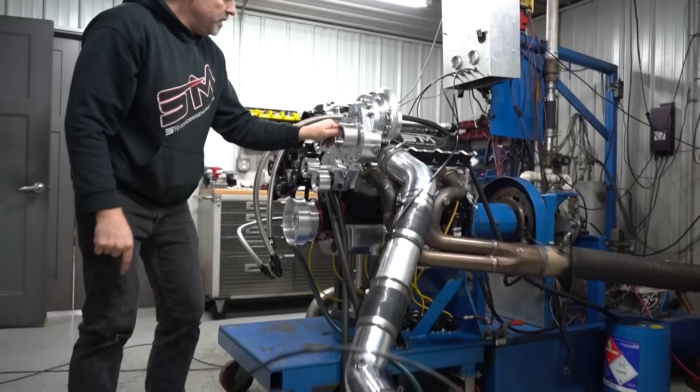3 blowers, 1 Ford block, a tube, no belt, not running anything. You want to see what's going on here, you better watch this video.

Hey everybody, in this episode we're going to show you a true street, an NMCA class where they got to drive this engine and make 3 back-to-back passes.

This thing makes some serious horsepower with twin TorqStorms, and the TorqStorm guys are here. We're going to actually test some other stuff, including a single blower instead of the twin, and I'll go over the whole package here with you in a minute.

Alright, so this engine is for TorqStorm themselves. Those guys have 2 or 3, I think they have 3 race cars right now that they're racing and doing all their development work and testing work on for the blowers.

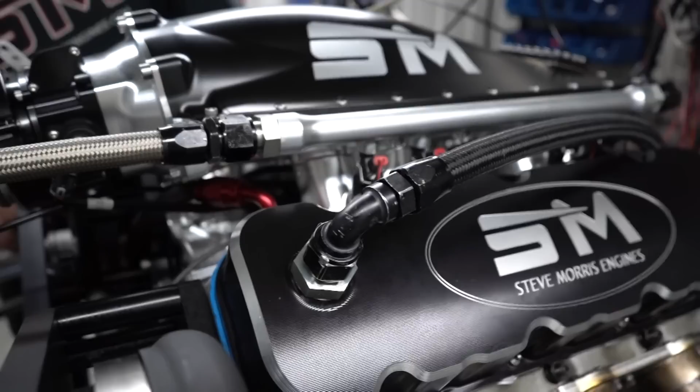Now, first off, let's cover the engine. This is our Stage 2 500, basically our Stage 2 540 cubic inch engine. Now this one happens to be a little bit bigger than that because this is the one that actually converted and used some parts that they already had, so this is 565. But the same thing as our Stage 2 engine that you'll find right on our website, with billet intake upgrade, and this is a steel rod motor, because it's on gasoline.

So let me tell you exactly what they got to do, and then we'll go back to the engine. So what they have to do is when they go to make their passes for the day, they can do all their testing and do anything they want there before the race. But during the race, they have to go make a 25-mile drive, put the car in the staging lane.

You cannot touch the car. You can't do anything except set tire pressure. That's it. You can't add fuel, subtract fuel, change fuel, pop the hood. You cannot do anything. You have to race it, and you have to race it round robin. You can't come back and cool down. You can't do any of that.

You literally have to go make a pass, come right back up in the staging lane, and they make you make another pass, then come back up in the staging lane and make you make another pass. So that's why this engine combination kind of fits our niche of what we do, which is duration, drag and drive kind of stuff. So this is a little bit different kind of drag and drive, but basically is a drag and drive. The not cooling down in between rounds is kind of a big deal, actually.

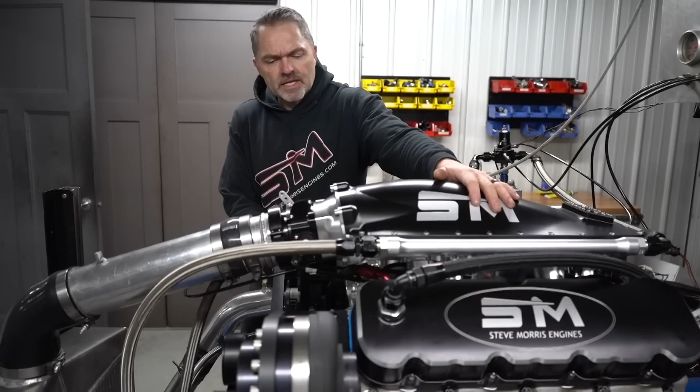Compression-wise, go back to that. These things, we typically set them up at about 10 to 1, right in that range. This is a steel rod motor because it's gasoline. Methanol motors, we almost always use an aluminum rod in those. Has our billet manifold upgrade. This is Holley EFI. This has a Dart 380 cylinder head on it. We'll typically use those, or we'll use the Brodix 383 headhunter heads as our typical deal.

Just a solid belt drive, standard camshaft, 842 lifter. This is just a really good, solid general piece like what all our Stage 2 stuff is. Like I said, you can go to the website and see what the Stage 2 package includes.

Now, what we're going to do is make our baseline pull, and this does make really good horsepower, especially for how much boost it makes. Now, before everybody gets all gung-ho and says, but it's got two blowers on it, why doesn't it make 5,000 horsepower? Listen, that's just not the point. Part of the packaging and everything that the TorqStorm guys do is, this is a legit serpentine drive system.

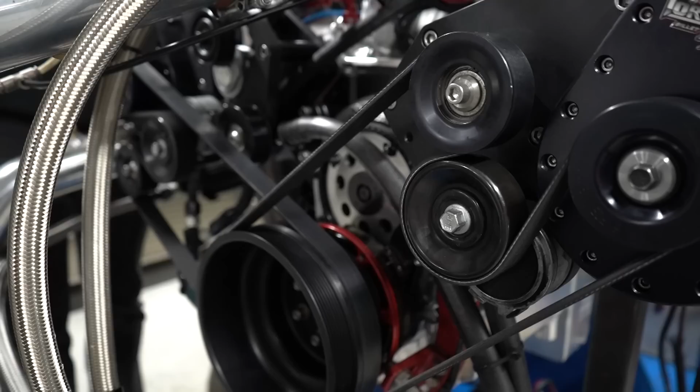The whole point of what they're trying to do is you can put AC, alternator, power steering pump, everything can all fit, and they have bracketry for all of this stuff, which makes it nice. It's symmetrical, just kind of a nice, cool package.

It doesn't need to, and they're not trying to make the maximum horsepower with their systems, but this makes some really good horsepower with the system. We are going to show you that they're developing and working on a bigger single blower for the extreme street class, a 91 millimeter supercharger, to compete in that class. And we're going to test it on this engine, which would technically be too big for that blower.

If you ever wanted to see anything about that, go to my playlist and you'll see some sections about blower speed and how blowers affect performance - how you can have too much engine for the blower. Let's just put it that way.

So there's a lot of stuff you can do there. We're going to test some other stuff, but first, let's go ahead and make a pull here. We've already done all the tuning, everything's all good. We're going to make a pull on this thing, show you where it's at right with this pulley combination, this boost, what this thing makes, which is really good horsepower, especially for something that is drag and drive with no cool down, no anything, no changes, tire pressure only. So let's go make a pull on this thing.

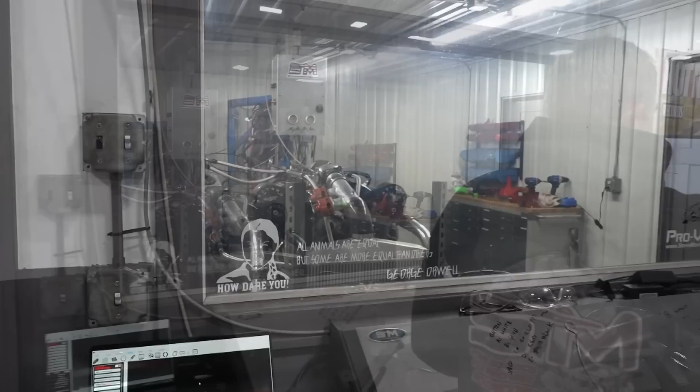Alrighty, so that's really nice power right there - 1,898 horsepower. Did I mention it's on gas, C16? So it will run on pump gas at a little lower boost level than this, and we'll go look at the boost right now.

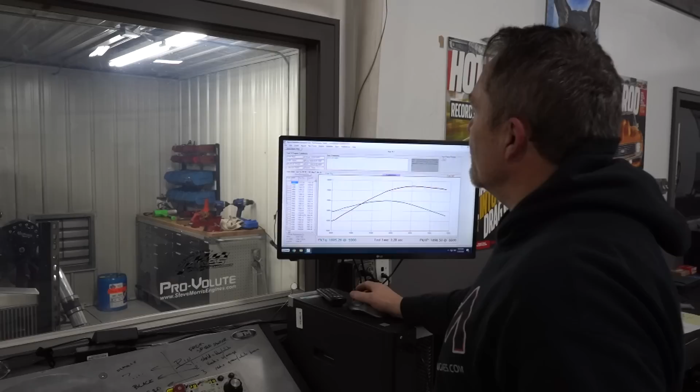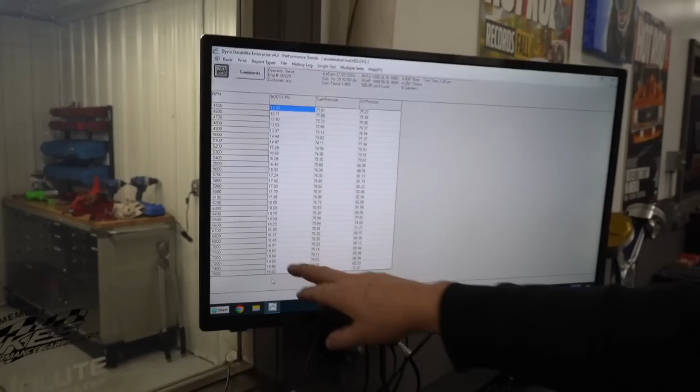And right there you can see that is at 18.5 pounds of boost. This Dyno's gauge is a little bit less, I think it actually says like 19 on the Holley. So that is our really good spot. Torque wise, 1,605 foot-pounds of torque.

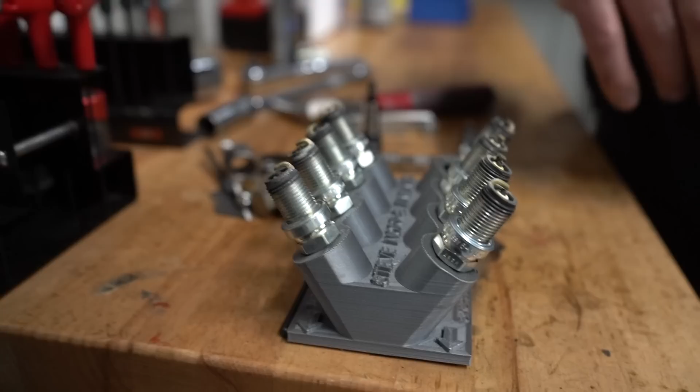Alright, so now we just made that pull, and I wanted to show you the spark plugs, because we always have questions about spark plugs. So you can come here, look at my little spark plug holder thingy, and it's kind of a cluttered mess over here right now. But one of the things that we did here is for Scott's car, he used to be running this with a blow-through carburetor.

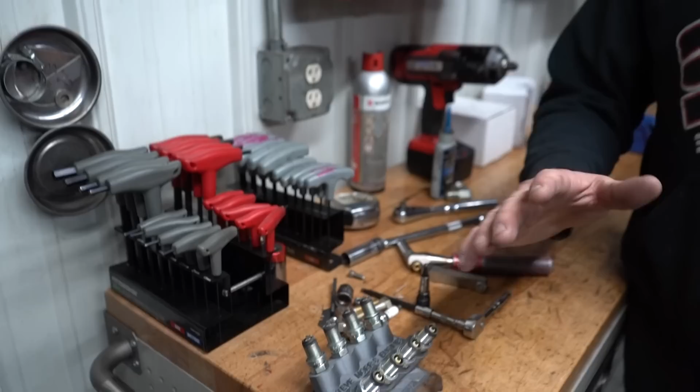And blow-through carburetors are fine, no problem. But this is obviously getting into that magic horsepower area where it's just physically impossible for the carburetor to make. It's beyond physics. Physics might be the wrong terminology, but it's not even rational to think that this carburetor can distribute fuel equally to all 8 cylinders.

Hence, and that's the same thing with the Snipers or any throttle body type injection system - individual port injection, we can do a much better job of controlling individual cylinder fuel. A carburetor, you cannot control individual cylinder fuel. There's always a sacrifice that one cylinder is going to be leaner and one cylinder is going to be richer than the other. It just is what it is. So you're always balancing, trying to make the happiest compromise.

Problem is, the higher the horsepower you go, you'll tend to have an issue. Somewhere down the road, it's going to pick on a cylinder and hurt a part. It just does. That's why I don't like to have this. This was because Scott did run this engine at that 1,850 to 1,900 horsepower level. Thankfully not very often, because that was actually faster than what the car could legally go. So at that really high horsepower level, it will hurt some parts.

So Scott wanted to change this thing over to the billet intake manifold, which I wanted to change it over to anyway because it's just better, and it is just drop dead sexy. So sexy - it's the best looking manifold on the market. Anyways, you can see the spark plugs here, look real good.

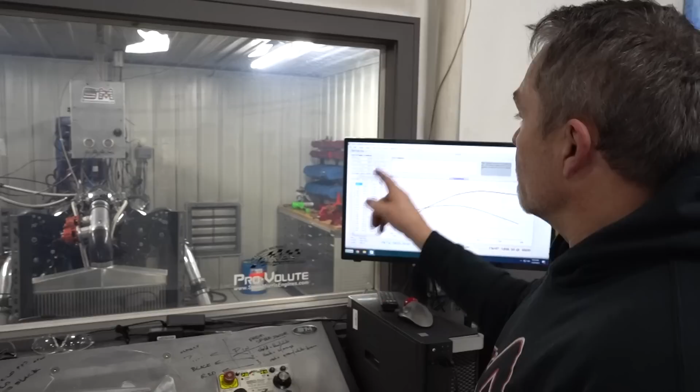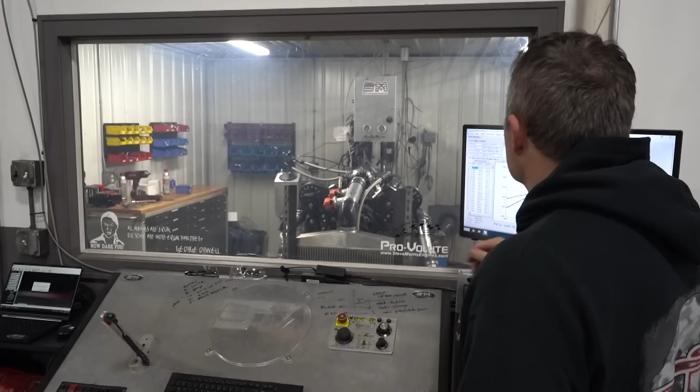So first thing we're going to do, this is our baseline. It's all tuned up, this is where it's going to run in the car normally. Now Scott has actually put a 750 cage in it so he can go faster than 850s like he was going, so he'll be able to go faster in that class. We'll be able to utilize all the horsepower that's there.

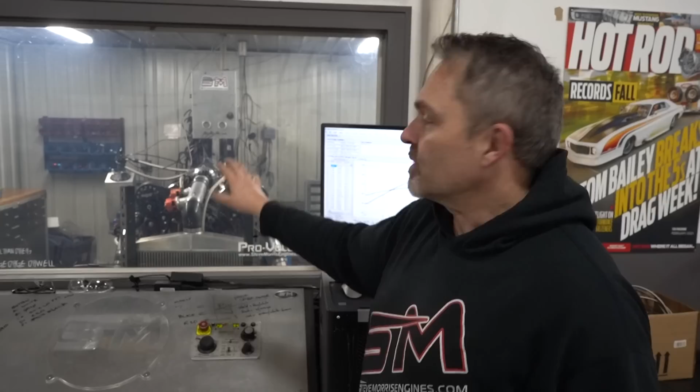So we're now going to put on a single one that isn't for this engine, isn't for this class, but is for the extreme street class. So they're going to put that all on there. We're going to do some testing and then do some testing on how much horsepower it takes to run that blower, which you'll find interesting.

Okay, so it looks a little odd, so get over the looking odd thing, because this is Chris, the other half of TorqStorm. This is Scott's motor, who is the other half of TorqStorm. So it's going to end up having the other blower put back on, so he didn't bother taking that one off. So that one's not getting driven by anything, but this is the new blower that you want to test. Tell us a little bit about it.

It's the TS91R, it's our new bigger blower. Seeing some good stuff on our test stand. We need to test it on a motor and do some comparisons, see where we're at.

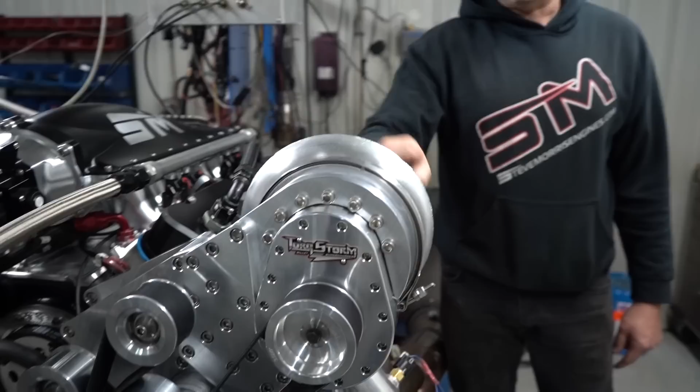Okay, cool. You'll see here too, they did a billet volute for it. So obviously they're developing with the billet volute and then going to end up casting pieces for it. We're going to still do the billet center section. So it has a bolt-in billet center section, a landing area. Yeah, we're going to keep doing that because there's advantages to that over the cast, different things you can do to the landing area.

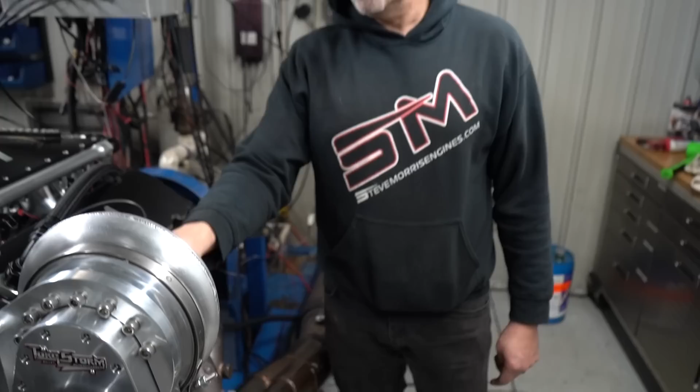Sure, okay, that's cool. And then you told me, so this is, you want to get on the back side, so this is a 6-blade setup. So you told me something interesting there, what you found. So they're measuring at their facility, they're measuring airflow, temperature, and pressure. And that the 6-blade is actually better than, in this blower, the 6-blade is better than the 7 and 8.

So you had a 7 and 8 blade, and those made more temperature. At the same PSI boost, same drive ratio, everything. So that would mean less horsepower. That's just basic math. It does.

So the other thing we're going to do here, I'll show you in just a minute, is then we are going to test how much horsepower it takes to drive this blower. I'll show you exactly how we're going to do that, because it is so stupid easy, but really interesting the way it all works. You just don't even think about it. But you'd be surprised, and we have other blowers over here that we're not going to mention or talk about, but we're going to actually test those too, because it's just kind of interesting to see direct comparison here.

So anyways, let's go out and make a run on this. This will be the exact same tune-up as with the twins, just with the single. All we want to do is just see what it does.

Right, and so since we're also leaning on it, or spinning it up pretty good, how fast are you spinning this? It's only 60,000 on the impeller speed. Okay, so we spun it harder than that on our test stand. But if this motor went more RPMs, we could run it harder, but it's like done at 67.

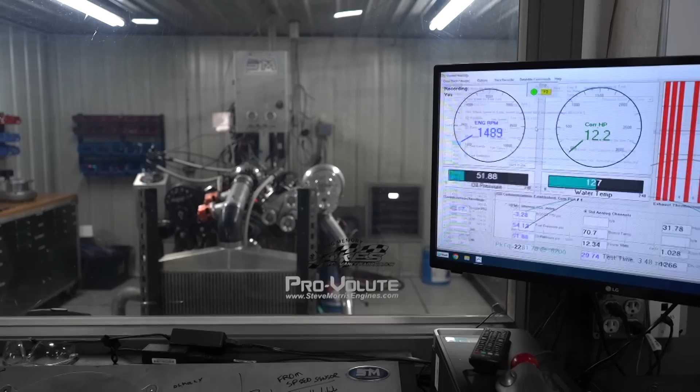Nothing broke there, that's good. All right, so what are you calling this blower again? This is the DS91R.

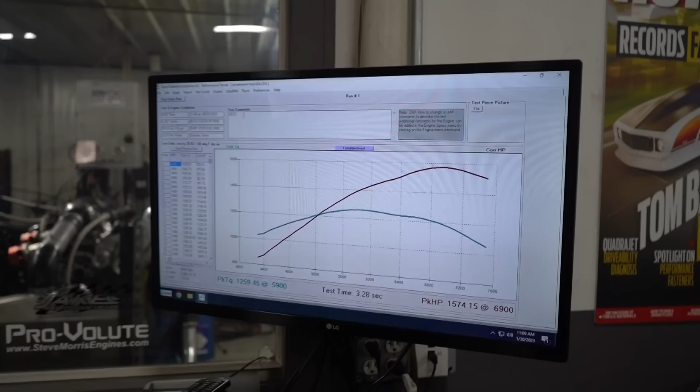DS91R. T as in TorqStorm. No, RT? TS. TS. All right.

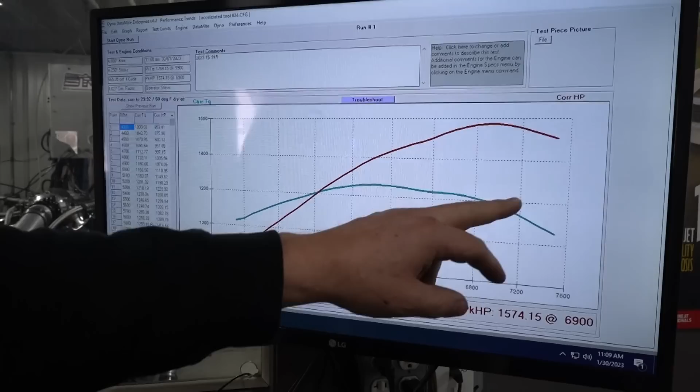Okay, so single blower mode, 1574. I ran it up to 76, it's just where it naturally lays over at. So at 5,900 RPM, 1259.

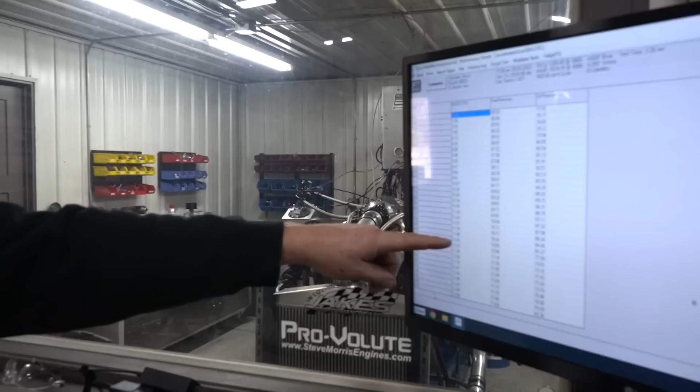Go look at boost, and we'll look at the data logger on the Holley here. So looking at our boost, it's either slipping the belt, or it's just naturally running out of air, possibly. I'm thinking not, but thinking it's slipping, I mean, the belt.

What do you think it should make for boost? Well, I don't know, we're not spinning it very hard. That's the thing, what did you say you went up to? 75. Yeah, well, that's getting pretty close to where we need to go. You keep it running, so maybe it is slipping the belt.

Let's go in there and see if it's slipping the belt here, we'll check it out, figure out what that actually should have been. Let's turn this water pump off. It sounds right, it sounds good. 75. I don't see any belt residue.

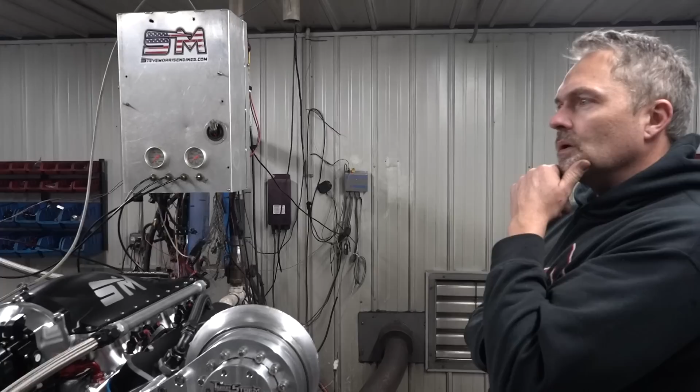This is 76,000 on the impeller, which is pretty close to what we ran that Procharger at then too. Actually, impeller speed, that had belt slip, so we don't know if that was accurate.

Okay, I think the power's good for the pounds of boost. 12 psi boost, 13 pounds of boost, and it's making 15, almost 1,600 horsepower, so the power's good.

What'd the brand X blower make? It made 1580, 1589. Okay, so really close to the same. But it's a 94 to a 91. Oh, okay, all right, well that's cool.

We'll look at the Holley data here and see what it's making for temperature. Did you take temperature off the other one too? Yeah, it was 263, I think.

Okay, our 3-inch tube isn't going to be a problem, is it? It's close to 3.5 all the way. Well, it definitely would be better, there's no doubt about it. So this blower is obviously designed for a 3.5 inch.

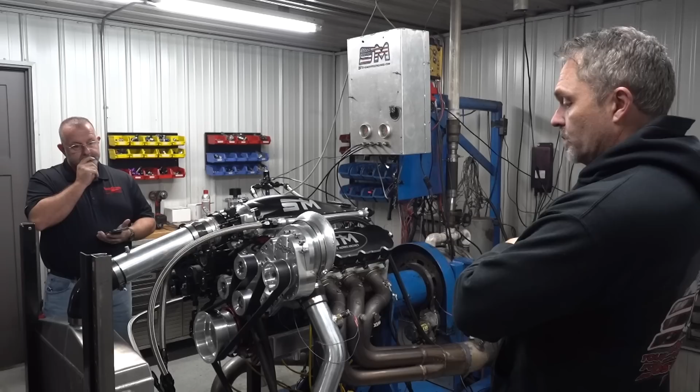Yep, you want to put a 3.5 inch on it? I got enough stuff to do it. Do you think it'd make that much of a difference? The inside of the tube is 3-inch. The inside of the volute is 3-inch. Basic plumbing principles apply, bigger's always better.

Always flows more, so probably worth trying, but it wouldn't change anything outside of changing temperature right there. It doesn't care about that. And we are probably taking some hot air here too. Theoretically, we really should probably have a log out or something, but it's still a pretty decent comparison to what it would be. I would expect it to be at least a little bit hotter, sucking off the header.

Yeah, you want to just put the 3.5 on there and just see if it makes a difference? It can't hurt, if you guys got time. I know you guys are kind of hurting for time. Well, I wasn't actually going to do it myself, I was going to make you guys do it. No, that's fine, we'll do it. I gathered up some tubing upstairs, and I think we have enough stuff to make it happen here. Let's see if we can make that, because that's a 3.5 inch inlet on the intercooler anyways. And I wouldn't be surprised if it's...

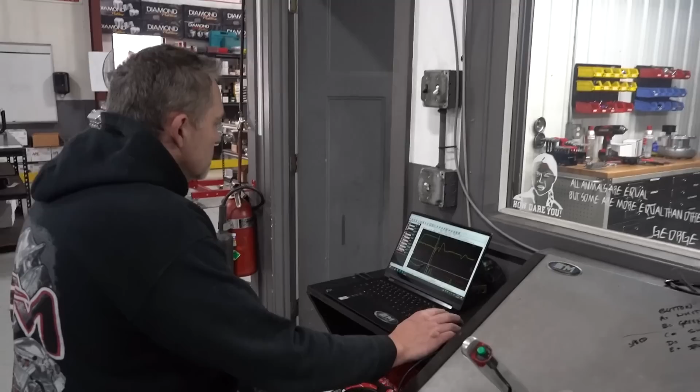And we're gonna look at air temperature real quick. Air temperature gets up to 225. 267 on the other one. Oh, okay, that's cool, really? That's good, that's a big difference. 267? Okay, so 225 degrees of air temp on that blower, which is good, especially considering we're sucking off the header there.

So now we're not really caring about the air temp, we just want to see if the tubing makes any difference. And then after we're done with the tubing, we're going to go to testing horsepower, parasitic drive loss on the blower. Very cool.

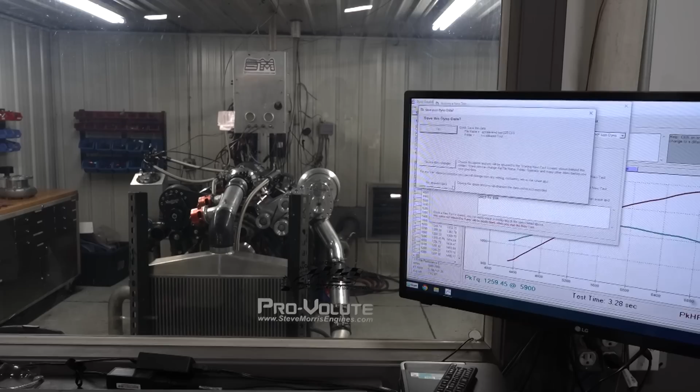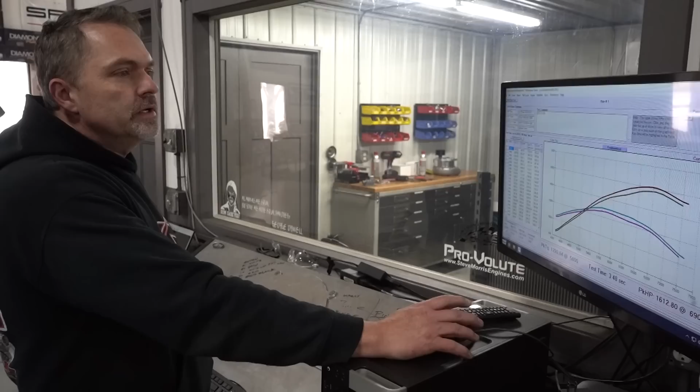Oh, it did pick up. 1612. So this is the exact same tune-up, literally just changed that pipe. Let's show previous. Yeah, that's pretty good, it's better all over. So let's see what it picked up. This gold line is previous with a 3-inch pipe, and this is with 4-inch pipe.

And let's hide that, let's go see what we have for boost. So obviously it would have picked up. Yeah, picks up almost a pound. Well, how about them apples? Nice, not bad for 20 minutes, half hour, yeah. So remember that.

Basic plumbing principles always apply: less bends, straighter pipe, bigger stuff is always beneficial for mass airflow. All right, cool, so now we're gonna put that pipe on. We'll show you this pipe, and then we'll show you how we're putting it all on, because it's pretty interesting.

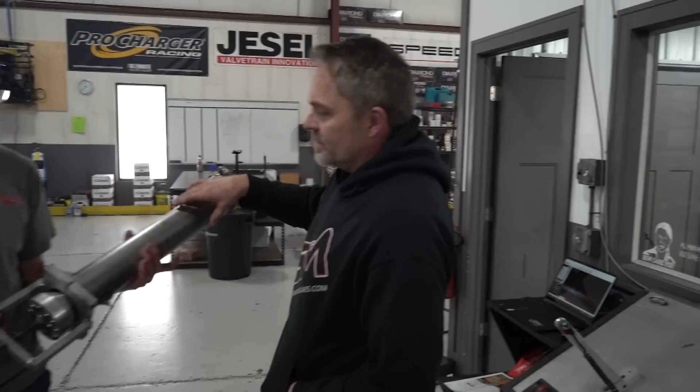So as you're processing it out right now, you start thinking to yourself, how much horsepower does it take to drive that blower? And then I'm going to show you how we're going to figure it out. So this is their tube they've made. Now what this is all about is they've already figured this all out on their test stand.

So they've got a great big electric motor sitting there spinning at speeds. You've got an LS running it right now. So they have an engine that's running it themselves, and they're measuring boost here, measuring temperature somewhere else, right there too. And then this is actually a restrictor, because how this works, people do not understand this, and I've talked about this a lot of times.

If you run this thing wide open, what it does in a turbo is overspeed and move a bunch of air. In a centrifugal, it puts a whole bunch of load on the blower, because it then asks it to move all the air it possibly can, unrestricted. It doesn't just overspeed, it moves a lot of air, and it drives the parasitic load astronomically high. It hurts the blower case, hurts the bearings, hurts everything in there if you do that.

So when you dump a compressor side, it's not like a turbo where you're dumping exhaust pressure off of it. It's not even remotely the same universe. You're dumping compressor side air off of this.

When you do that, think of it like a shop vac. You got your shop vac sitting there, and you put your hand over it. What does it do? The motor speeds up because it gets unloaded. The inverse is exactly the same: if it's open, it's got maximum load on the blower, maximum load on the vacuum. It's the same thing, and that's a simple way to think about it.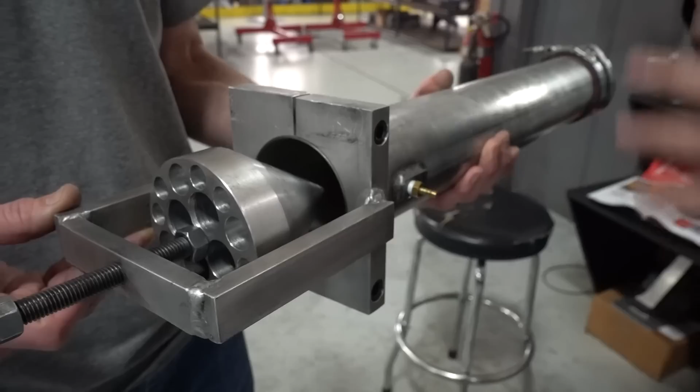So they have this set so it restricts, building a certain amount of boost and back pressure, which simulates how much flow is going through there. They're also measuring flow there, we're not doing that. We know where this needs to be set at in order to get X amount of pressure and X amount of flow. They already know because they've already tested this.

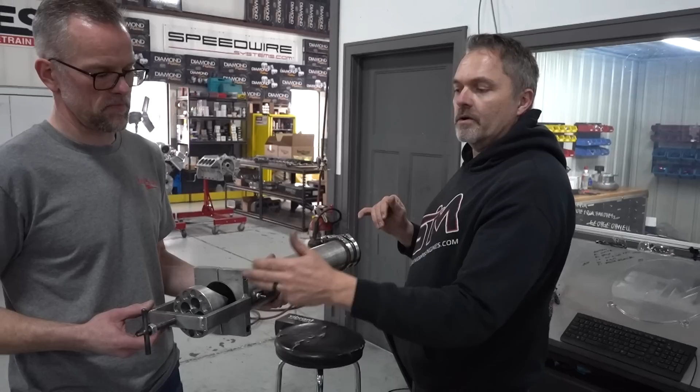So what we're actually going to do, the simple stupid part, is disconnect everything off of the engine, including this intercooler. We'll take that tube off, take the whole intercooler right off of it, and then dyno the engine NA, just to see how much horsepower the engine makes all by itself, no blowers, no boost, no nothing.

And then we put this tube on the blower, hook the blower back up, but don't run any air to the engine. The air will just exit right out the room, and then run the exact same sweep. Any difference in horsepower between totally NA, not driving anything, and then driving the blower but not getting any of the benefits of the boost, gives you how much horsepower it takes to drive that blower.

It's very cool. So we're going to go there, have these guys go in and put that all on, move the intercooler and get that stuff all out of the way, and then we'll run it.

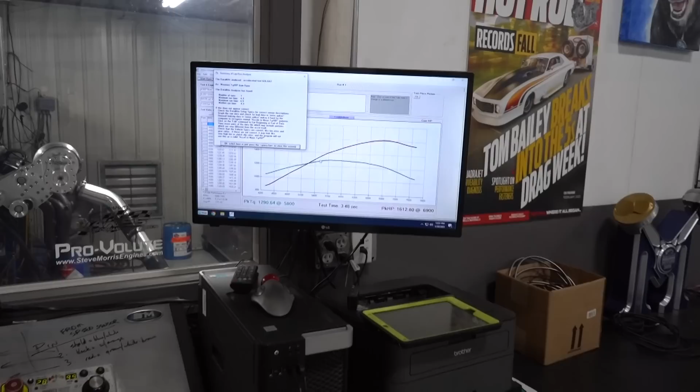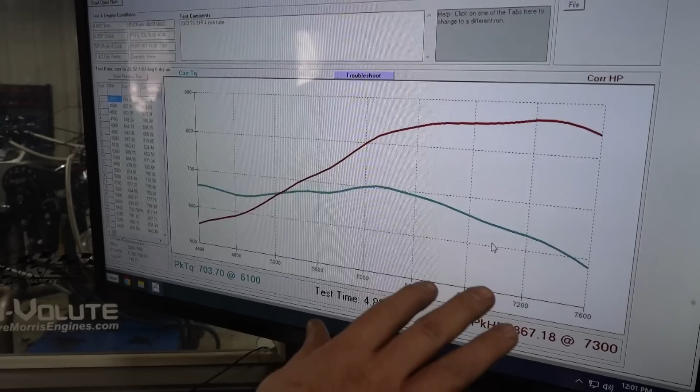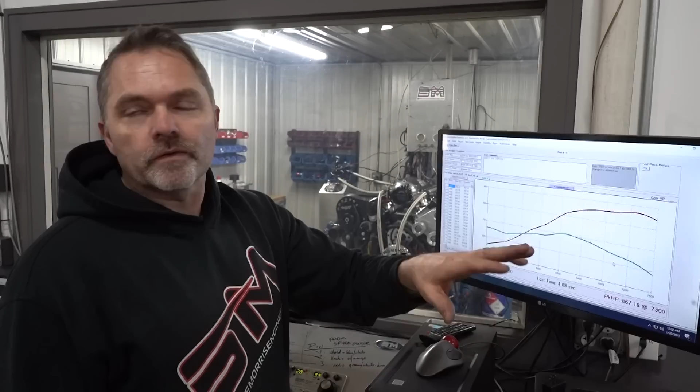Alright, so that's pretty consistent. Now, I have not worked on a really super good tune. We could probably make this a little bit better and smoother for an NA tune, but we're not super concerned about this. Actually it's on the boost tune, so I haven't done a separate tune up for this. This is just where it's at, because when I tune stuff, or when Kyle tunes stuff, we try to make it run everywhere, let's put it that way. So that's good, we'll have that as a baseline there.

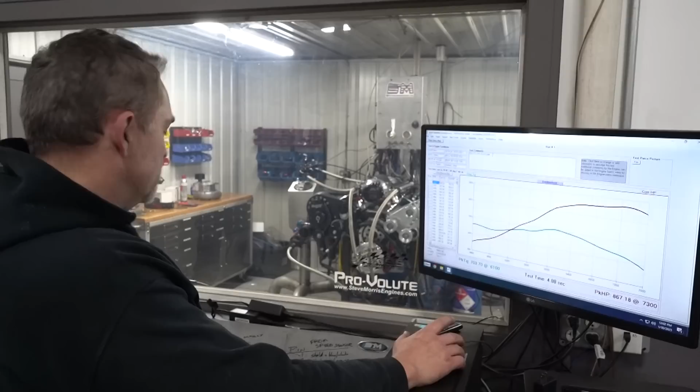And let me correct this, because that was NA. Alright, and this is actually a really good engine. We did do some other testing before, and it's right in that range. It's a nice piece, and it would probably be like 875 or something like that. I can smooth this stuff out, but I'm not going to bother because I don't want to change the tune-up. So now we have that as the base.

So now we hook up the belt on that supercharger, and figure out where to turn that little cone nozzle to. We're going to set it up at a certain boost reference or boost number. Now, is there a multi-million-dollar way of doing this exact same thing? Absolutely. This is not the multi-million-dollar way, but I'm telling you, this is really quite accurate to do it this way, it just looks a little hokey. So let's go put the belt on that thing, and we'll run it up. Todd's gonna stand in there.

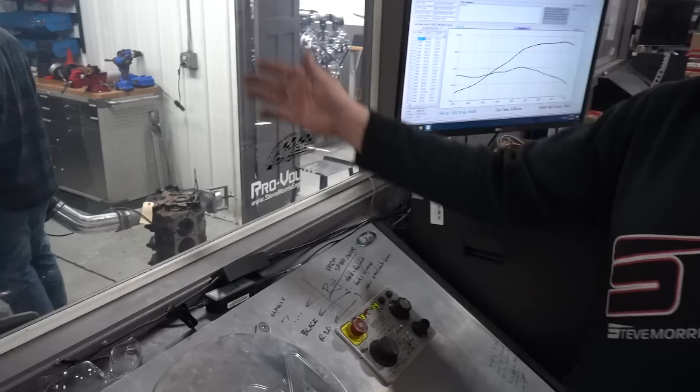I told Todd, instead of running it through the block, because we have to have the tube anchored, that block because the tube is gonna go crazy. I said it would be a whole lot cooler if Todd was in there holding it while I was dynoing it the whole time, like a fire hose of air. That would have been awesome.

But he's a sissy, doesn't want to do that kind of crap. So we had to come up with an extremely heavy small block Ford block that we're using for ballast. Just a quick little check. The warranty was over like last week, so it really doesn't matter if we break Scott's engine again.

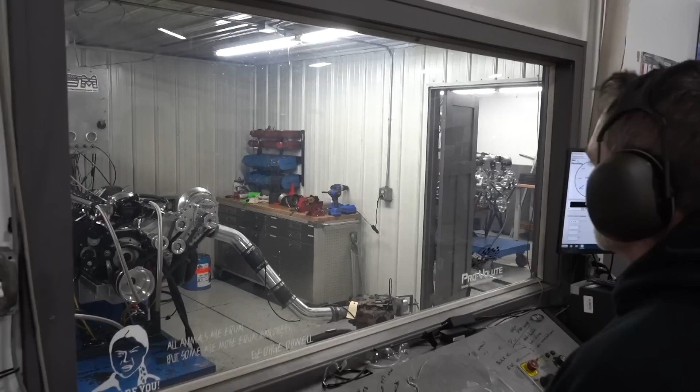Okay, this is that magic spot where we pause and make sure that we're not going to kill each other, or kill something else here. Make sure everything's right.

Can you zip tie on that valve so it doesn't turn? Why don't you run the jam nut down on it?

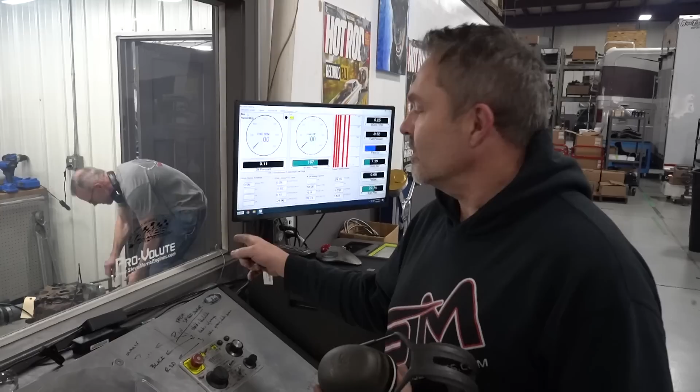So, yeah, I don't think anything's gonna fly off. Nah, it's all pretty good. That block probably weighs like 200 pounds because it's full of concrete too, so it's a solid block. I don't think it's going anywhere. It looked pretty good right there.

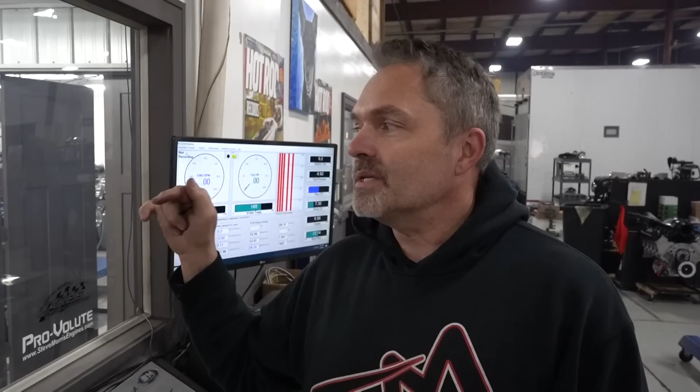So now we'll come in and we're just going to duplicate that same pull. And what I would not be surprised at is if it won't rev all the way up. I've had that before, where the dyno can't unload. I don't know. Let's find out.

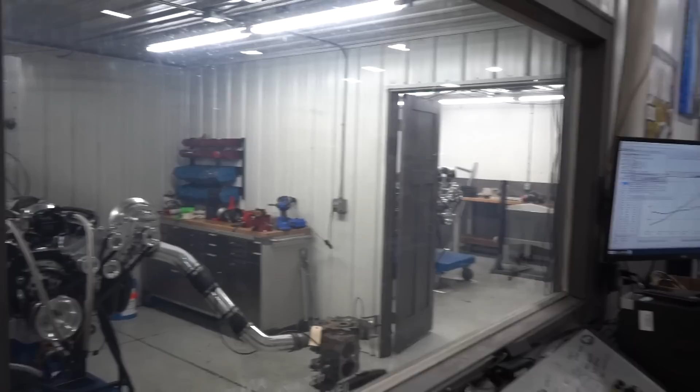The one in the other room. Well, there you go. So, I don't know if that was on, were you videoing this? Probably on camera.

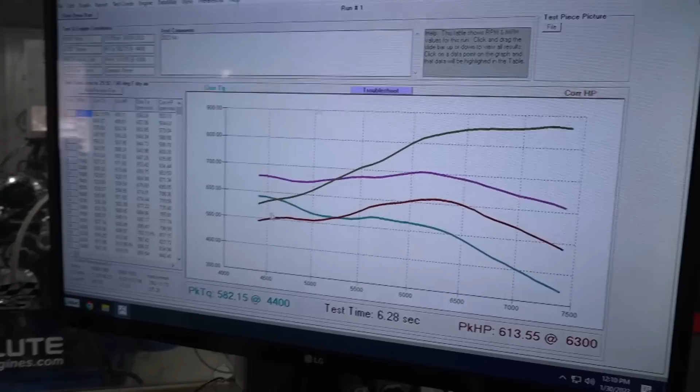This is the craziness that happens. So keep in mind, when you blow a boost tube off on a centrifugal and it's just dumping in air, this is the kind of crud that's happening. There is our comparison, which is just insanity.

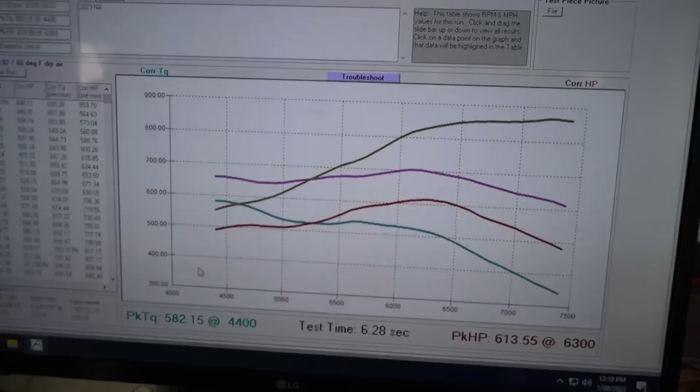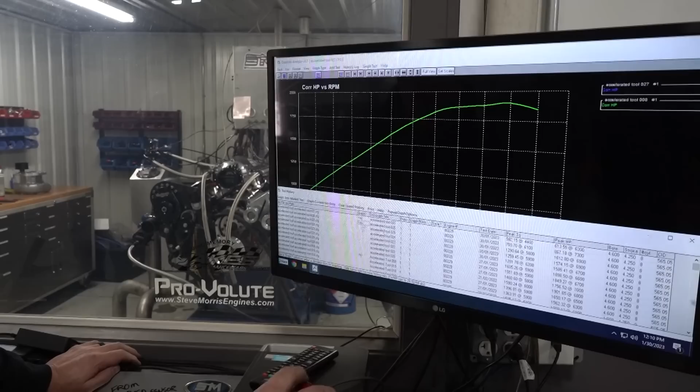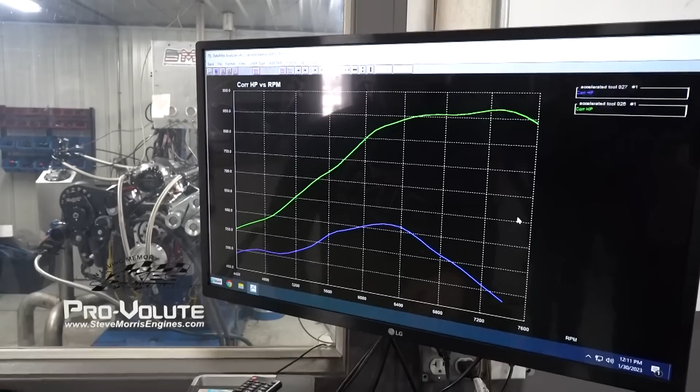We have a grand total, let's see where we're at here, and let me get this in a better line, one that's a little easier to read. Alright, green line is NA not spinning the blower, and blue line is spinning the blower.

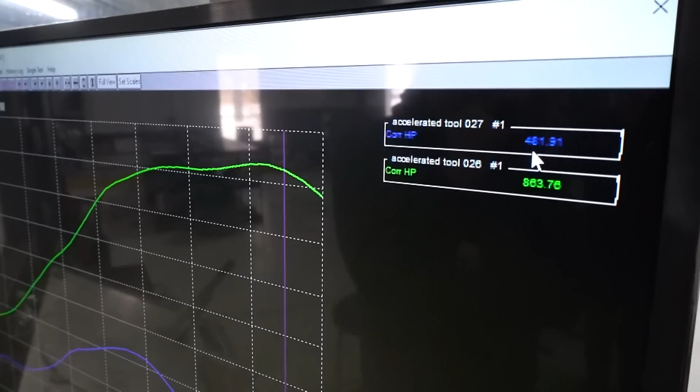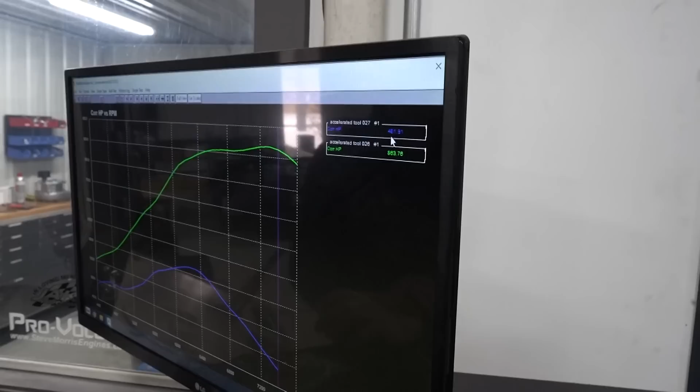Oh yeah, so this is flat out. And we'll look at the boost curve and see what it's actually making, because I think what it ends up doing is probably still flowing more air than what it actually is on the engine. So if we didn't maintain 12 or 13 pounds of boost, then we know it didn't do it, right? Okay, so right there, that's 480 horsepower, which I think is pretty much wide open.

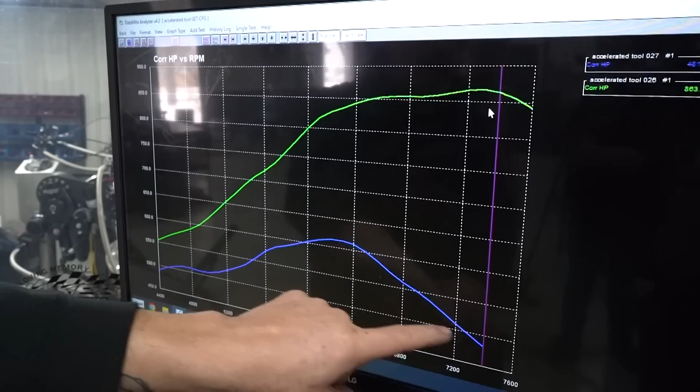And you can see it significantly changes right here. It gets significantly ticked off right in this area where that parasitic even multiplies even more. That's why I think it probably didn't make the boost. So this number here is 220, which sounds a little more realistic, a little more normal.

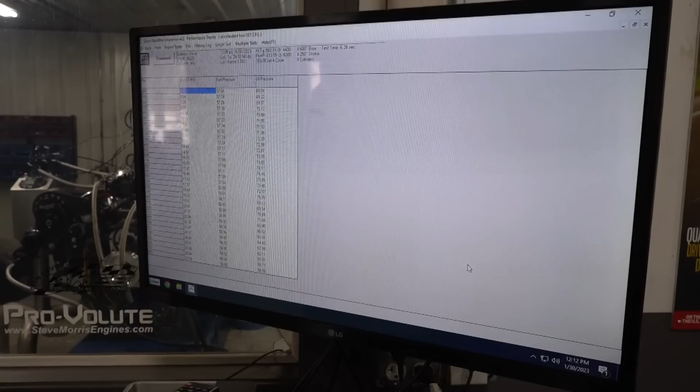So let's go back and find out where we're at for boost. Make a report. Well, shoot, I don't know. Now I have to think about it. It says it made 27 pounds of boost right there.

It made a bunch of boost on our tester, that was up to 25. We tested it just steady state, you know. So how do we simulate? If we open the valve more, we'll just have less boost. It would have less boost, but it'd drive more, but it should take more. I bet it doesn't take more.

We've seen on our stand that when you put more load on it, the horsepower goes up and you can't get the RPM out of the motor. Put more load on the supercharger, by making the boost go up, it takes more horsepower to run it.

Okay, I don't know, we've never seen 27 pounds of boost. I ran up to 30. 30, 3, oh, 4 turns, open it up. Yeah. Like if we know about 8 pounds at 4,500 or 4,400, if we go to 5 pounds or something maybe, or even maybe a little less than that. I don't know. Let's... because then it won't spike to 27.

Yeah, now it's interesting. Oh, so what's going on there too is if you probably saw sparks flying out of it.

What's going on is, especially on the front, because the back, it's ticking the starter pinion. That one don't really care about, but the front threw sparks off the crank trigger because it's actually pulling the crankshaft that far forward, towards the crank sensor.

Oh, really? It's lifting it up that much. Yeah, belt drives, that's why it's pulling the bottom pulley up towards it. Every centrifugal does it, that's just the way they are.

That's why you break LS cranks, that's why you break a lot of stuff. They'll break the snouts off of cranks because they're pulling on the front of the crankshaft so hard. All right, let's go ahead and open that thing up.

That is actually a good reason to have twins, because then, let's see here, so it would be... still pulling it upwards though. So this one pulls that way. No, it's a little bit... yeah, it still pulls it upwards. It still would have to pull it up a little bit, but it wouldn't be just one direction, I guess.

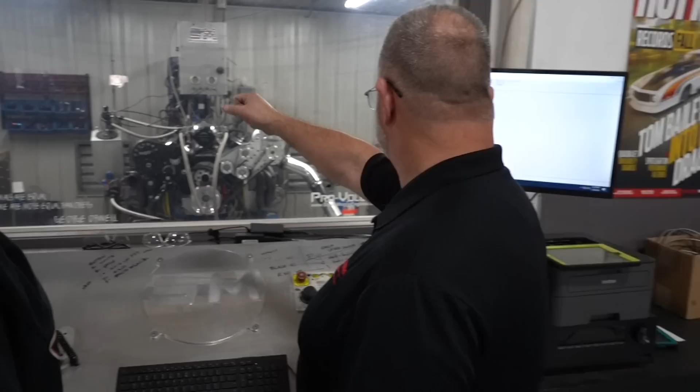All right, well that's interesting. Actually, yeah, because one will be pulling, since it's always the drive side, so that one's pulling out this way, that one's pulling out this way. So it is opposite, it is opposite. One's kind of on the top, one's on the bottom too. Gotcha. All right, let's run that again now with less restriction.

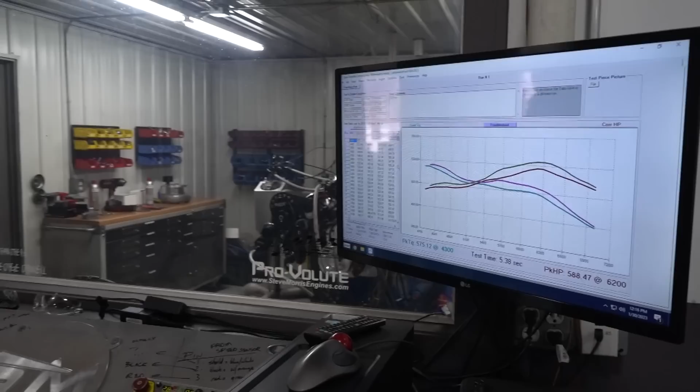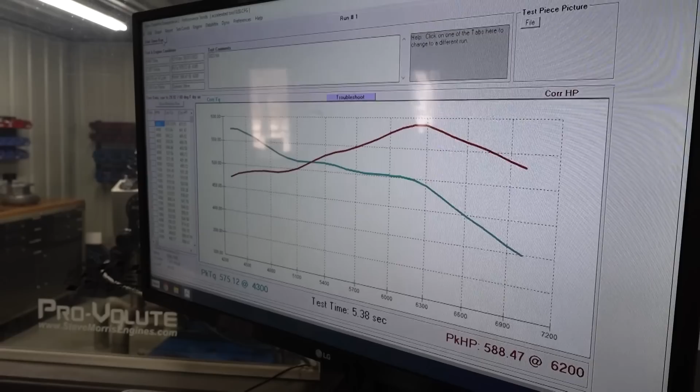Let's look at this. All right, so... yeah, okay.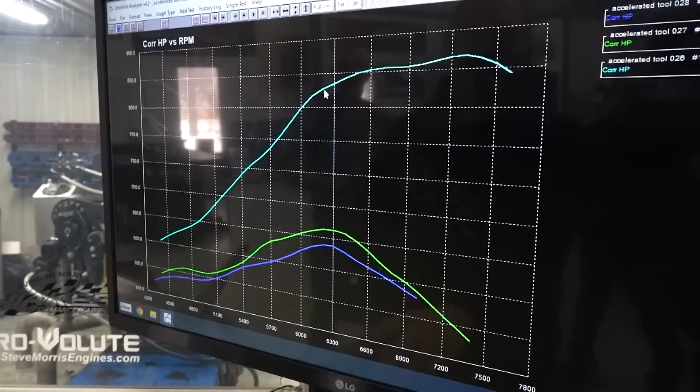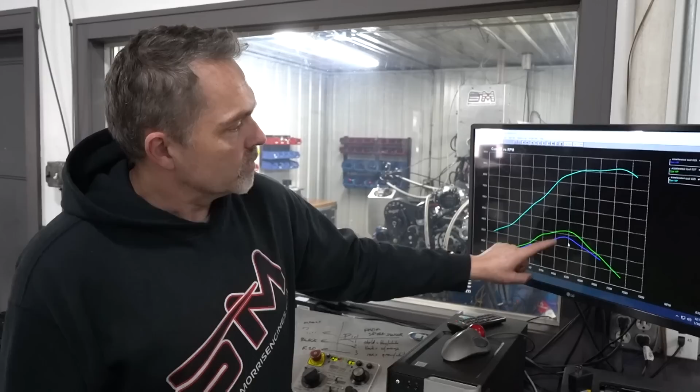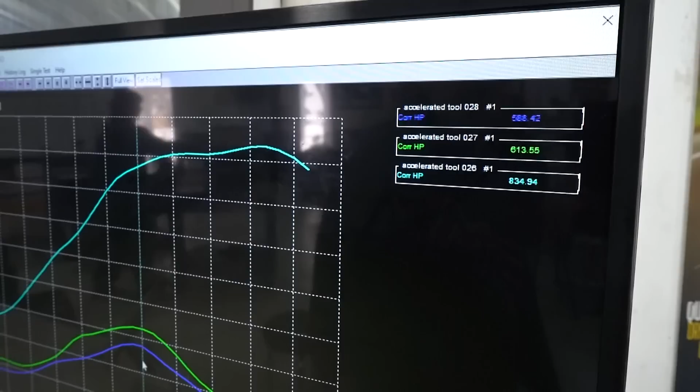So open restriction made less boost, and it made another... the blue line right here is what we just did, the green line is what we did at the first boost setting, NA obviously. So that's another 40 horsepower more to drive it.

Oh, hey, we're not into the secondaries. That's what we're looking at. Yeah, so the more air it moves, the more horsepower it takes. Interesting. Yes. So, no, we don't.

That's why we do this, right? Yes. So that was how much horsepower? So it'd be this peak number there, then, basically. That's what we're looking at.

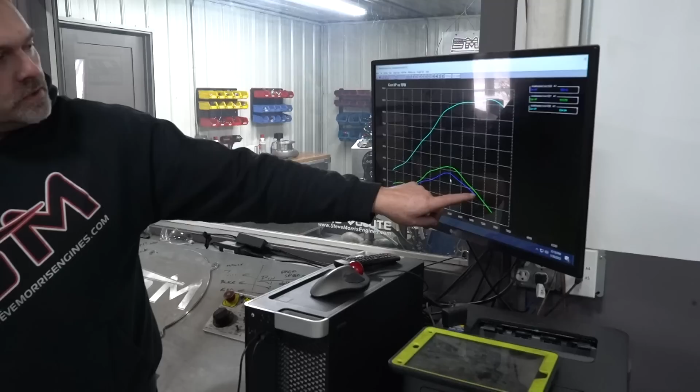I mean, well, now it does, down here - if I would have run it out farther, maybe it ends up taking about the same. So I wonder if it just gets to that spot of the map, period, I would figure. Once it reaches a certain spot in the compressor map, it probably doesn't ever... once you run it off the map, you can't run it off the map more. Yeah, I mean, maybe it just stays out there.

I don't know, so, see, this is the way you figure stuff out - we just test it and try to think about it here. This thing doesn't... we can stall that compressor by cranking up the boost where we can actually see that, because the flow will stop. So we look at how much flow is coming in, in our test tube, and as we crank up the boost, when the flow stops, that's when we go to another part in our map.

So we go to a certain RPM, run it up, set it at a boost level, look at everything - the flow, the CFM, the temperature, where that is in boost. Then go up 5 pounds of boost, look at the same thing, CFM. Right, so that's how you make a compressor map.

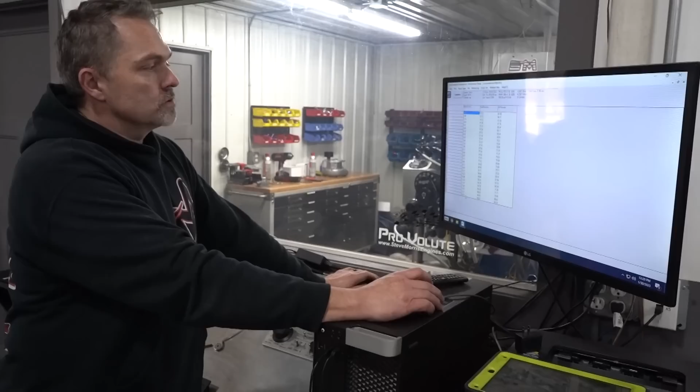Okay, so here, but we don't know horsepower on our stand, right? No horsepower numbers. And that was it, that's it - 12 pounds of boost. Yeah, that's pretty much right there. So I would...

It's that awkward thinking moment. We're watching the process happen right now. Insert the Jeopardy theme song in here. This is where it's doing a little circle of death on your computer.

Still thinking. Still thinking. Still thinking. Huh. We will, we're going to continue processing that out.

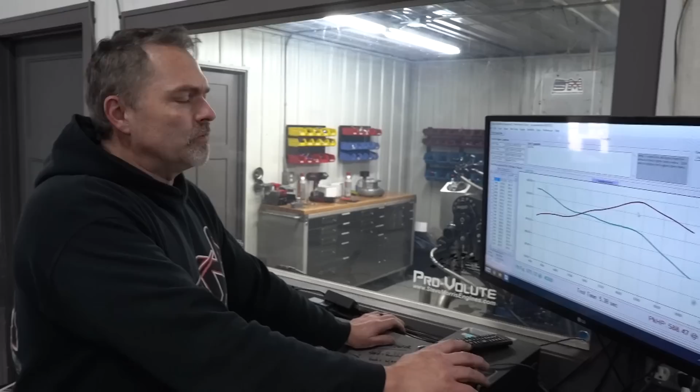This is how the whole system works. I've done this before, last time was quite a few years ago, with a bigger blower, not a TorqStorm, just to see what it would do. When I went to an unrestricted, wide open tube on a 540 NA engine, it made 750 horsepower, but I couldn't get the motor to rev over 4,500. It just went dead. You couldn't really do it that way.

So I always figured that at best case scenario, that thing would probably take somewhere in the neighborhood of 500 horsepower right there, and we're less on this. It's interesting information, isn't it?

It is. It still does the same thing where it just starts pulling the crankshaft, pulling the snout far enough that it starts touching the crank sensor. So a lot of horsepower to drive that kind of centrifugal.

I'm not 100% sure. I don't think the boost number is a direct relation to when it's flowing through the engine. The only way we'd know that is we should put a flow meter on the inlet of the supercharger to see how much air it's really moving.